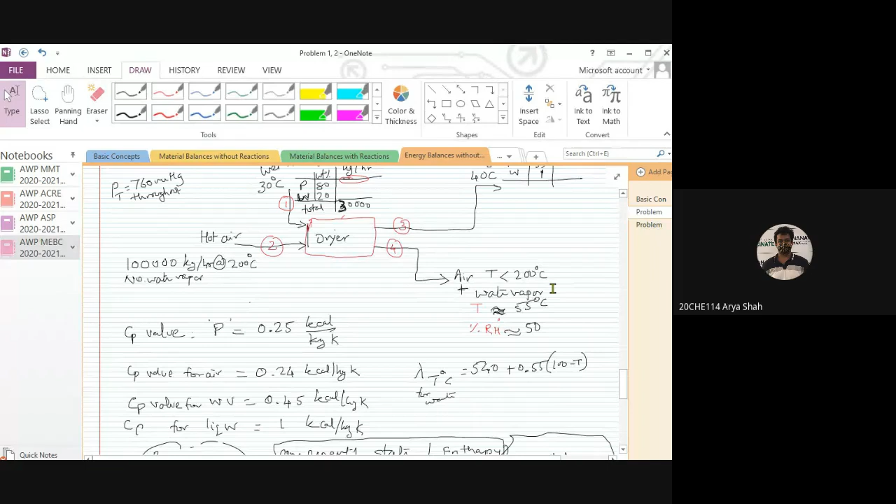Understood, sir. Okay. So now, recording has started.

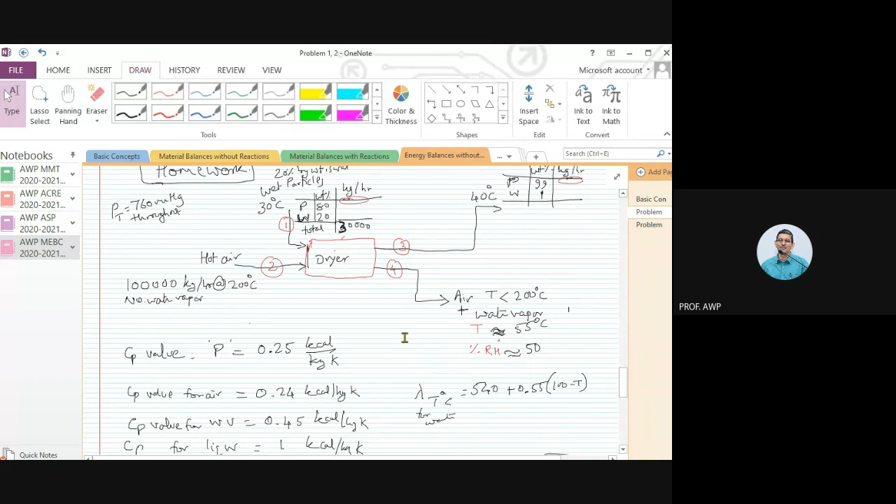All right, so shall we see this problem? Shall we solve this problem, or shall we go to the next problem, or shall we solve the problem with respect to that reference method?

Yes sir, yes sir. Yes for what? With the reference method. Solve the method with the reference method. Okay, fine, fine, we will solve.

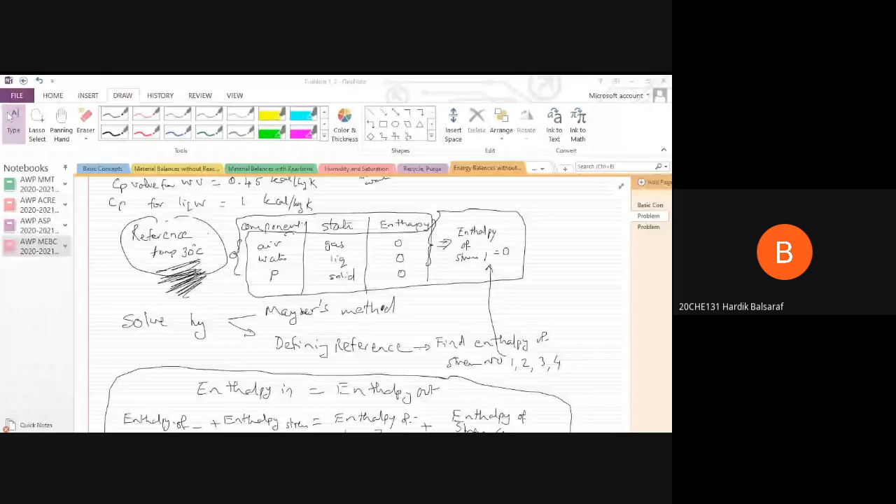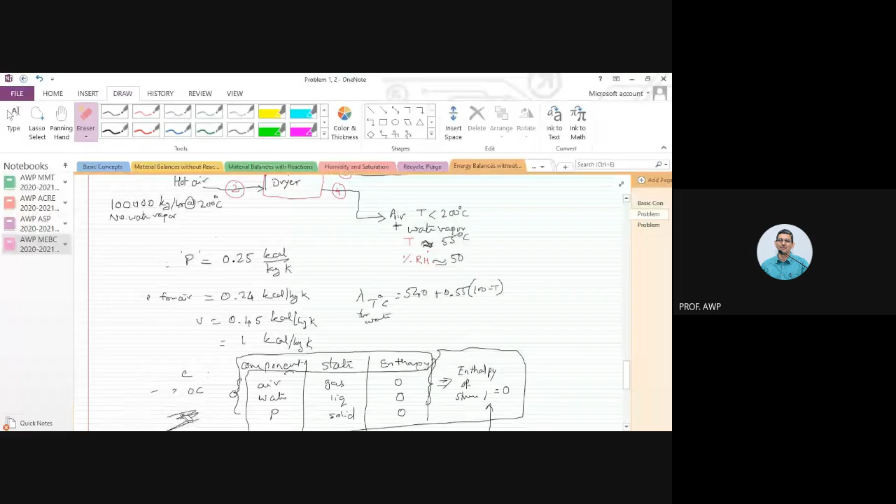So let me just delete all these things, because I'm not going to tell you the actual solution completely. I'm just going to show you how to solve, in terms of the formulae, and then you can actually substitute the values and calculate. Let me just drag and delete all this once and for all.

All right, so what we are going to do, like potential energy, we will say that enthalpy at some reference condition is zero. Like we are saying potential energy at the ground floor is zero, right?

But if there is a basement, then we can say that even if I set the basement as a reference zero for potential energy, then the ground floor will also have some potential energy. Or if I'm living on the third floor, if I say the floor of my house is a reference, then any object on the floor of my house has zero potential energy, right?

So we are going to say that at some reference condition, enthalpy is zero. Now, for setting enthalpy to be zero, we have to specify components and their state. So what components are there in this problem?

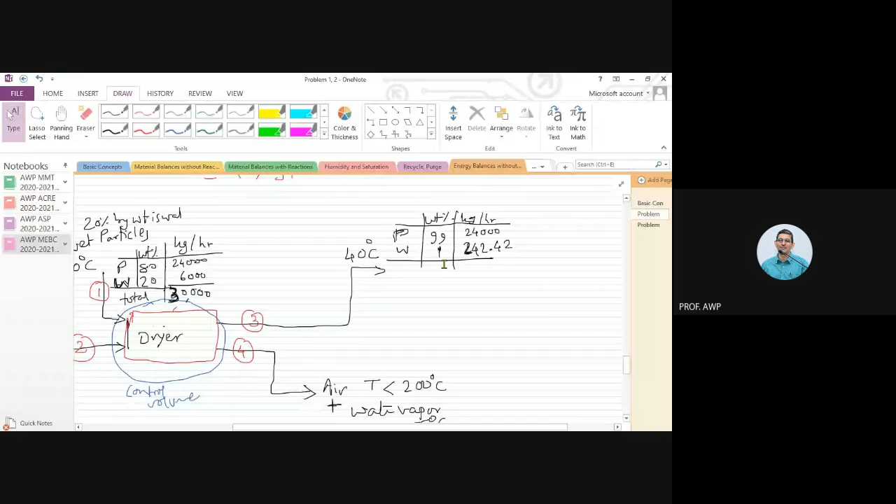That is nothing but 242.42 kgs per hour. Anybody gets this value? Anybody doesn't get this value? Just 242. Right, now let's work out the enthalpy of stream number 3.

What does stream number 3 contain? It contains P, 24,000 kgs per hour in the solid form at 40 degrees centigrade. It also contains water, 242.42 kg per hour in the liquid state at 40 degrees centigrade. So what is the enthalpy of this stream number 3 with respect to this reference?

That would just be 24,000 into Cp of solids into 40 minus 30, plus 242.42 kg per hour into Cp of liquid water into 40 minus 30, giving the enthalpy with respect to the reference. This is in terms of kgs per hour, Cp is in terms of kilocalories per kg Kelvin, temperature change in Kelvin. Kelvin cancels, kg cancels. So this stream number 3 is taking out enthalpy at the rate of so many kilocalories per hour.

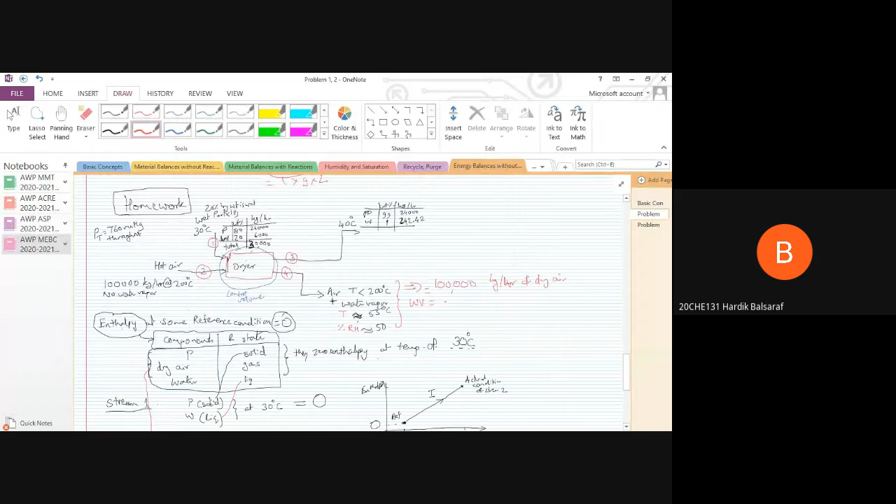How much water vapor is it going to contain? If I do a material balance across this control volume, the blue control volume, how much water will it contain? 5757.57. Right, 6,000 minus 242.42 kg per hour of water vapor. So if you just calculate this number, 6,000 minus 242.42.

It is 5757.58, let's say. Now, what is the temperature? We don't know what this temperature is, right? But we know that it contains this many amount of dry air and this much amount of water vapor.

So what we are going to find for stream number 4 - what does stream number 4 contain? Dry air, 100,000 kgs per hour, at some temperature T degrees centigrade. We don't know that T, right? It contains water vapor at the rate of 5757.58 kg per hour at T degrees centigrade, isn't it?

What is my reference? My reference is dry air at 30 degrees centigrade having zero enthalpy, and liquid water at 30 degrees centigrade having zero enthalpy. So with respect to this reference, if I look at the enthalpy of this particular stream, what would that be? Enthalpy of stream number 4 would be enthalpy associated with the dry air and enthalpy associated with the water vapor.

If you take this blue as a control volume, now we can say enthalpy balance, just like we have been saying material balance: whatever enthalpy comes in must be equal to enthalpy going out. Why? Because there is no extra enthalpy that we have provided to the dryer, or there is no heat lost from the dryer. We have made it a nice insulated, adiabatic kind of dryer. No heat comes in from outside, no heat is lost to the surroundings. Right? So enthalpy coming in.

So enthalpy coming in from stream 1 plus enthalpy coming in from stream 2 must be equal to enthalpy going out in stream 3 plus enthalpy going out in stream 4. Right? Do we have everything? Yes, we have enthalpy of stream 1, 0 kilocalories per hour. We have enthalpy of stream 2, so many kilocalories per hour we worked out. We have enthalpy of stream 3, that we worked out. And we have now enthalpy of stream 4. Right? Only one unknown is there. You just solve for T.

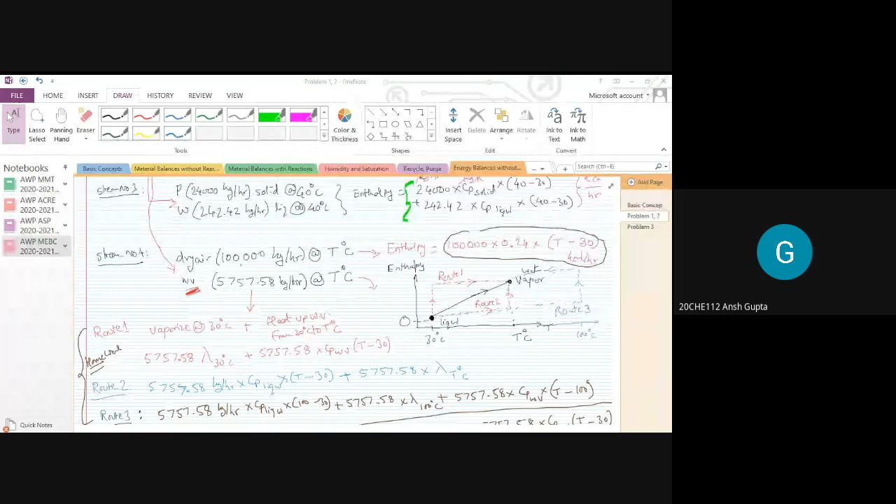Is that okay? Is it okay now with respect to reference? Any other question? Any other doubt? Anybody has any doubt in this method? No, sir. Ansh doesn't have any doubt. Can we go to the next problem? Yes, sir.

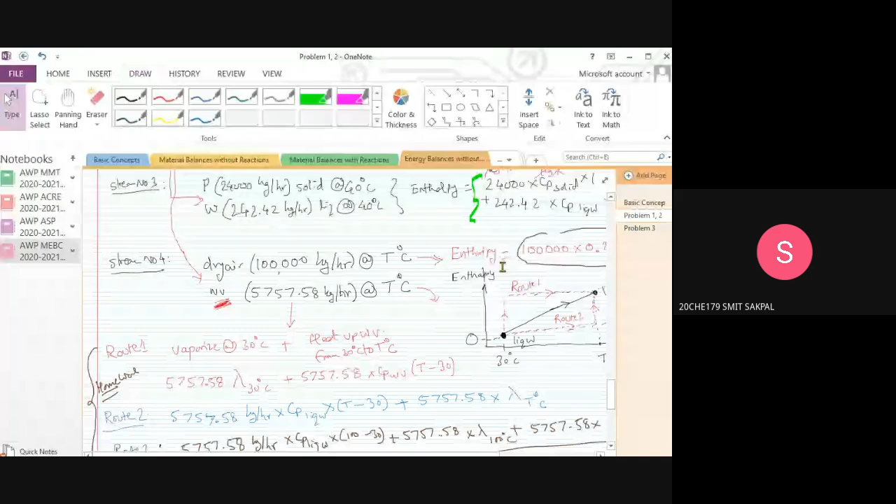Okay, so there is something called a cooling tower in chemical plants. I will tell you what that is. So have you...

So at home, if you have to cool something, what do you do? Put it in the fridge, okay. Or increase its surface area if it's a liquid, okay.

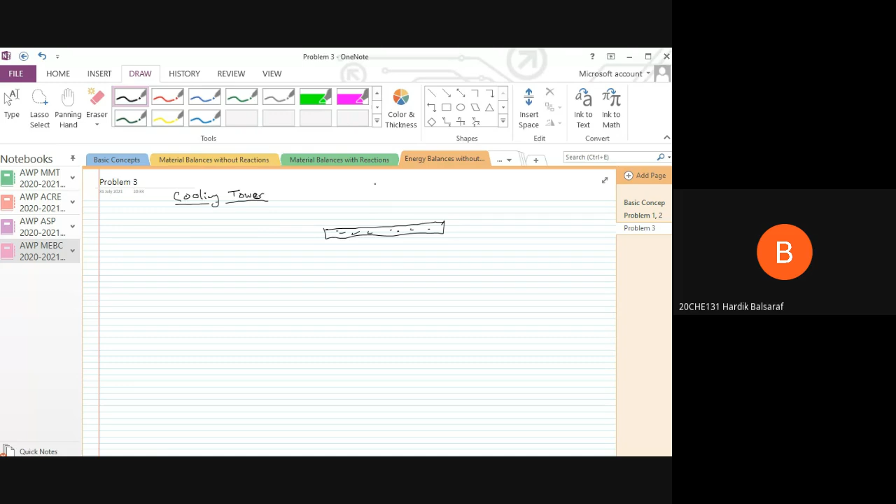Suppose you are eating Maggi, you have made it and you want to eat it, but it is boiling hot. Now how do you cool Maggi? We take a plate, take it in a plate, spread it out, and then stir it and keep it under the fan, right? There's some other way also you can do it.

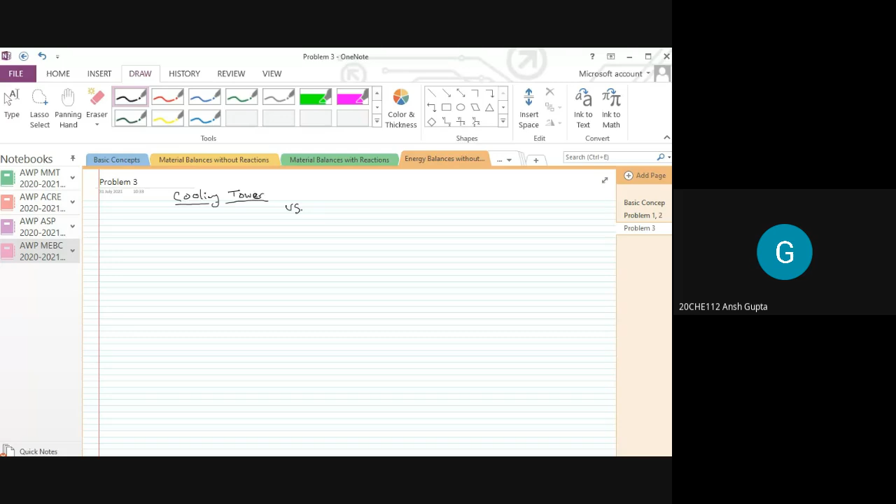Sir, use a bigger utensil and put water in it. Right, you take your Maggi here and your spoon, and you take water in an outside container and make sure you stir this also, right? So this water picks up the heat from the Maggi, and this water becomes hot. Now what do you do with this water? The Maggi, of course, you eat, right? So that is out of question. What to do with Maggi is understood. What do you do with this hot water now?

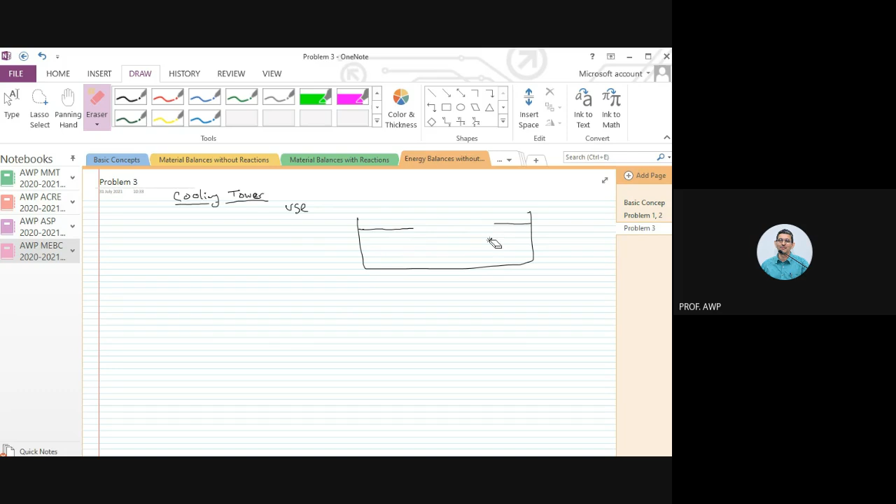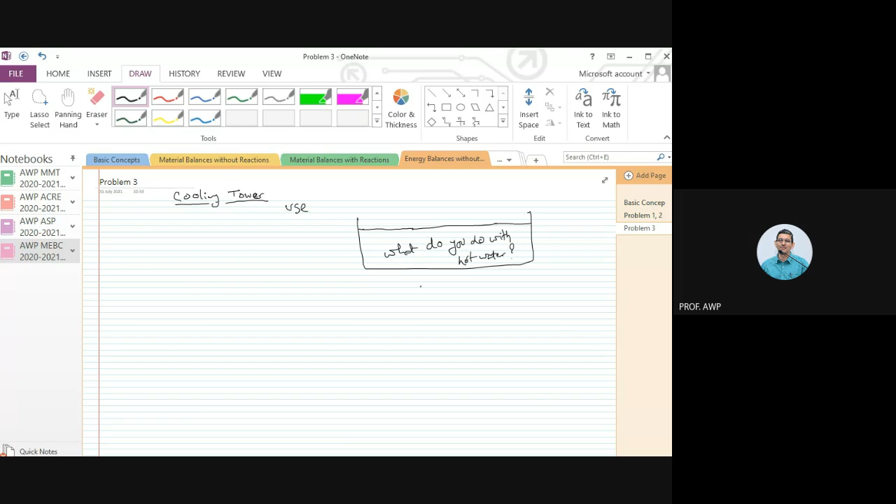Give it to your mother. Give it to your parents. Give it to your younger sister or younger brother. No? What do you do with this hot water at home? Just throw it down the drain, down the sink, right?

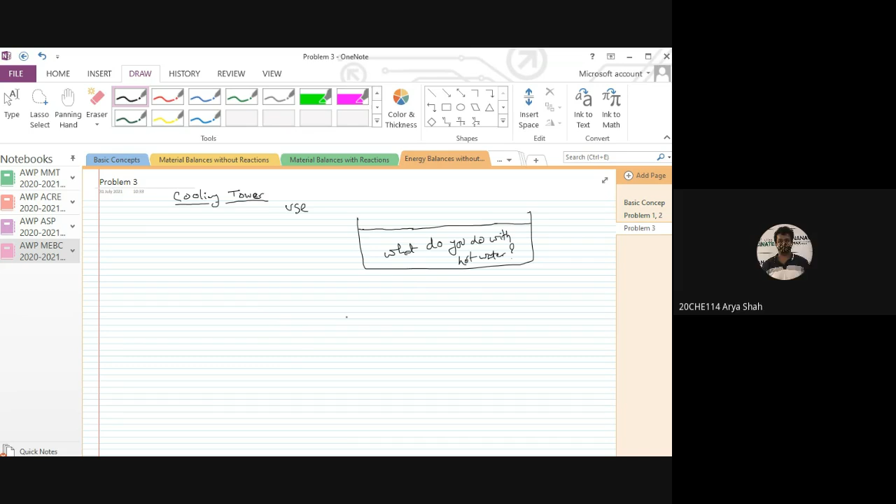Unfortunately, when you're talking about plants, you use the same concept. You use something called cooling water to take out heat from something. Let's say you want to condense some vapors, or you want to cool something from, let's say, 200 degrees centigrade to some 40 or 50 degrees centigrade. You use cooling water to take out heat from that particular process or substance, and in turn, this cooling water gets heated.

Let's say it gets heated to 50 degrees centigrade. Now, what do you do with this cooling water that has now become hot in the process? If you throw it down the gutter, what will happen?

We'll have adverse effects in the environment due to heated water. The overall temperature would rise.

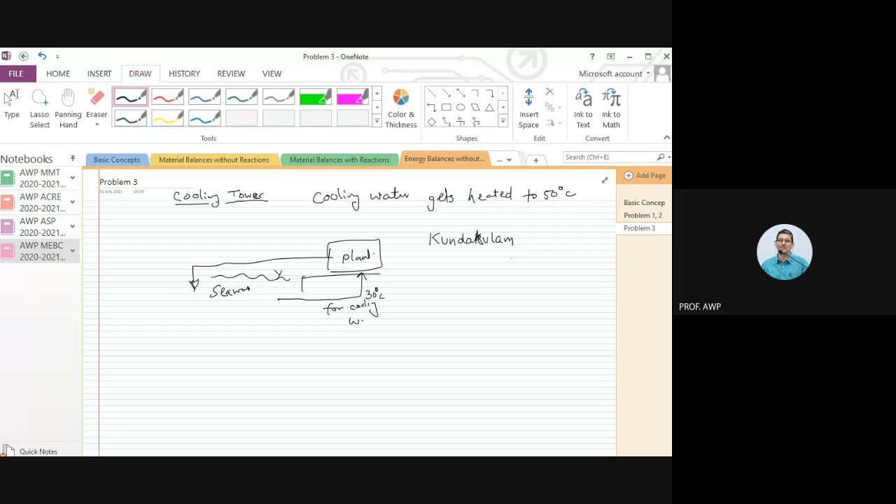So seawater maybe it is coming into the plant at 30 degrees centigrade, and going out at maybe 40 or 45 degrees centigrade. Just for this problem, we are taking 50 degrees centigrade. So these fishermen started protesting, and therefore this nuclear power plant ended up in some problem, but it is resolved now. It is on.

So we need a way to cool the water from, let's say, 50 degrees centigrade to some, let's say, 30 degrees centigrade, so that the cooling water can be recycled back to the plant, right? So what we will do is, this was our sea, this was our plant.

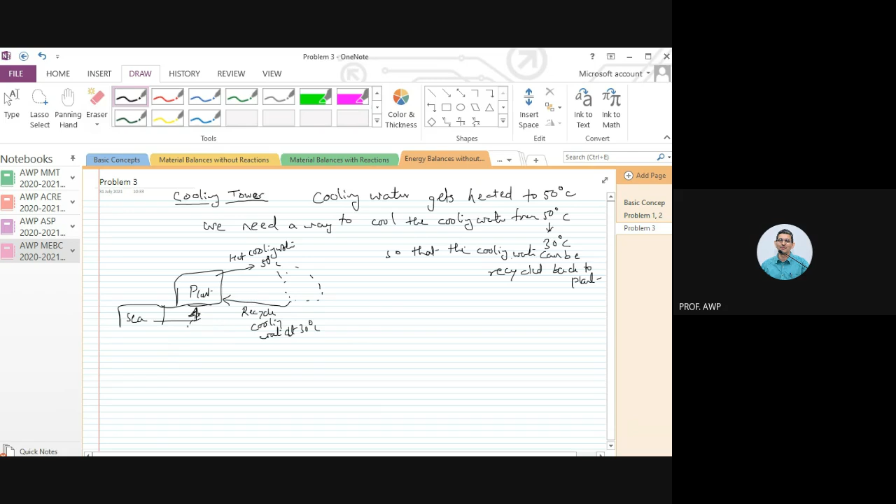We will take cooling water, seawater, at 30 degrees centigrade. We will get hot water. This is at 50 degrees centigrade, but we will do something to this water so that we can recycle cooling water at 30 degrees centigrade. Then I don't need this seawater intake, or I'll need it, some amount, but not large amounts.

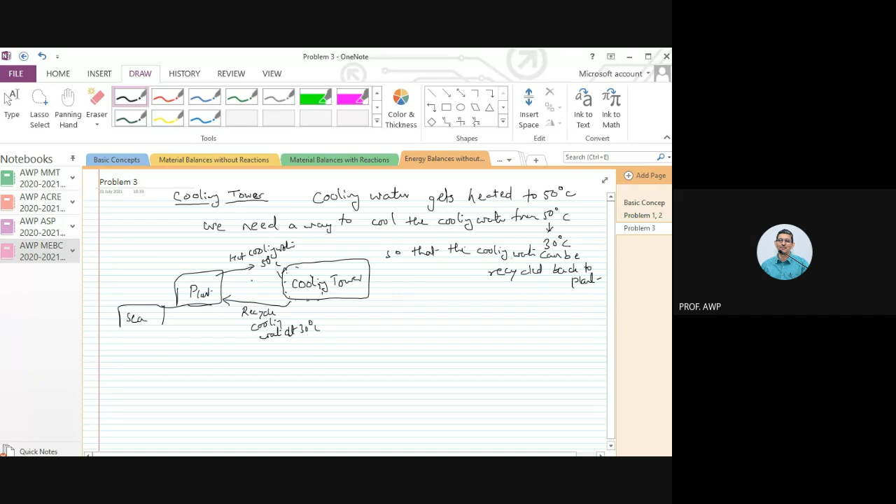Do you agree? So something is done in something called a cooling tower. The cooling tower will be used to cool that hot water back from 50 degrees centigrade to, let's say, 30 degrees centigrade, and we will recycle that cooling water back into the plant, right? Have you understood the problem, or have you understood the context of the problem? Now I will tell you the actual problem.

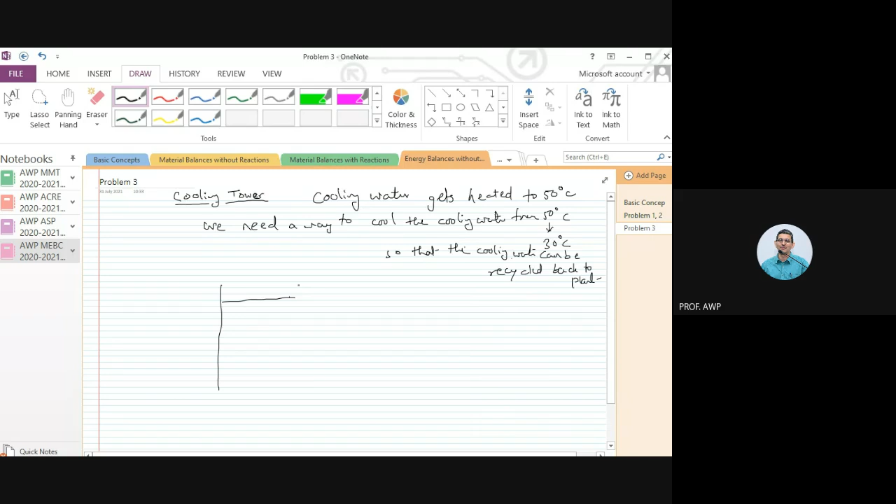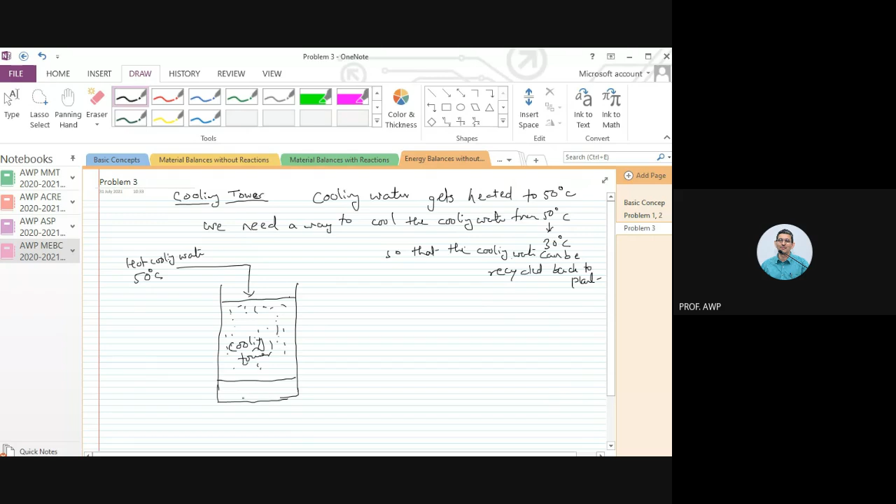Context of the problem is clear? Yes, sir. So this device called a cooling tower, it's an equipment. So this hot water, now this is the actual problem that we are going to solve. Let's say this hot cooling water is at 50 degrees centigrade. We spray this cooling water and make it flow down this column. It's a column, and then we collect this cooling water.

So that means heat has to be taken out from this cooling water, from this hot water, right? Yes, sir. Can you think of some way of taking out heat from this cooling water at 50 degrees centigrade?

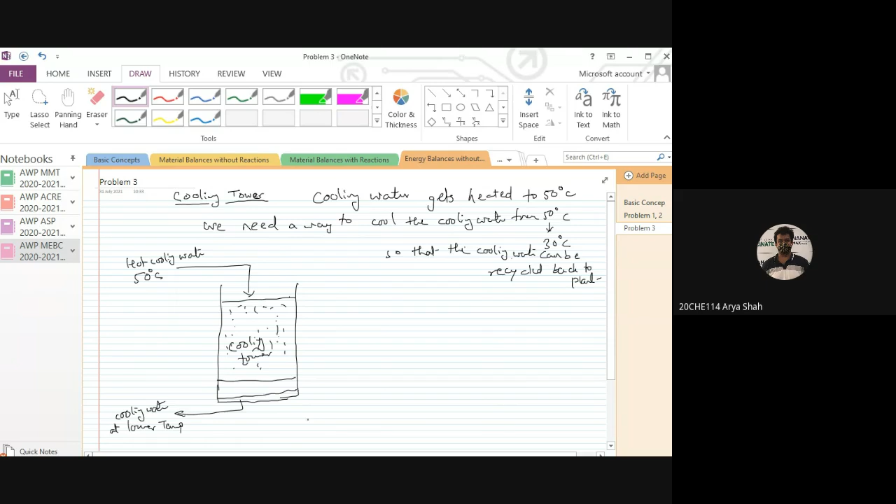By supplying air that is at a lower temperature, and with very less humidity, relative humidity is very low. So we supply ambient air, which is at a temperature lower than 50 degrees centigrade, and also not 100% saturated. So some of the water vaporizes to saturate the air, and then the rest of the water gets cooled because enthalpy is taken out from the water itself.

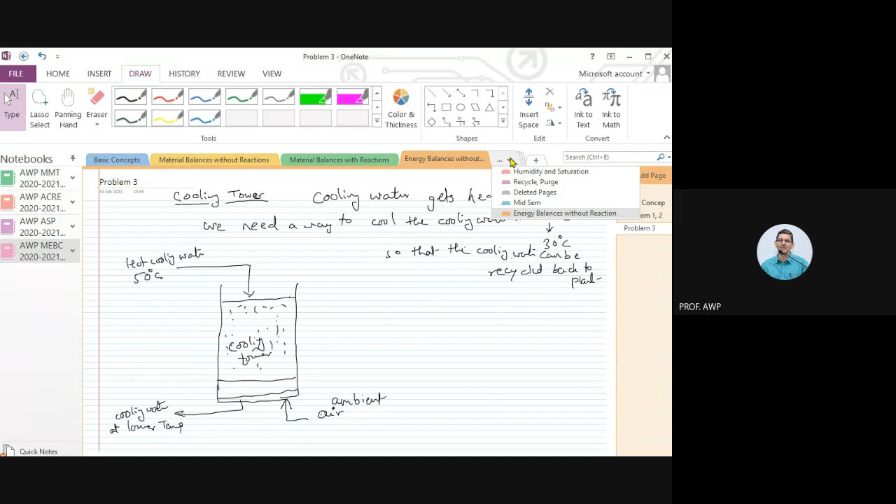Just like our cooling, we had wet bulb temperature. Do you recall? That water was cooling down. Do you recall the wet bulb temperature? We had water temperature falling, falling, falling, falling. Then it came to wet bulb temperature. Yes or no? Yes, sir. Same thing is going to happen here as well.

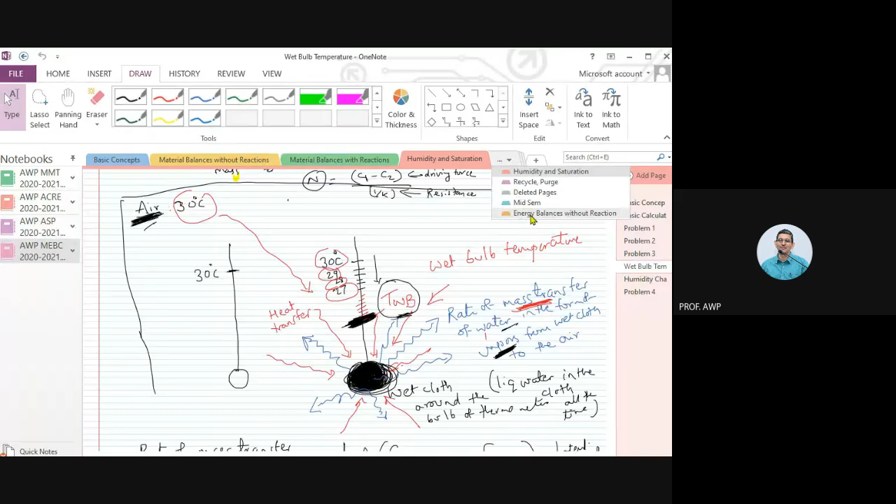So we will supply ambient air, which is at a lower temperature. This air will now become hotter and more humid air.

And this air can go to atmosphere. Do you agree with this? This is how a cooling tower works. And then this cooler water we can recycle.

Okay, so here is the problem. Assume that this hot cooling water is at 50 degrees centigrade. We want this cooling water, after passing through the cooling tower, to be at 35 degrees centigrade, so we can recycle it back to the plant. Air that is supplied, ambient air, let's say it is at a temperature of 30 degrees centigrade, with a wet bulb temperature of 25 degrees centigrade.

Okay, let's take the basis that we are supplying 1 kg of this hot cooling water, and we supply 0.5 kgs of dry air. Dry air means the dry air part of the ambient air is 0.5 kgs, but it will also come along with water vapor because it has a wet bulb temperature of 25 degrees centigrade. Let's assume that the total pressure is 760 mm Hg throughout.

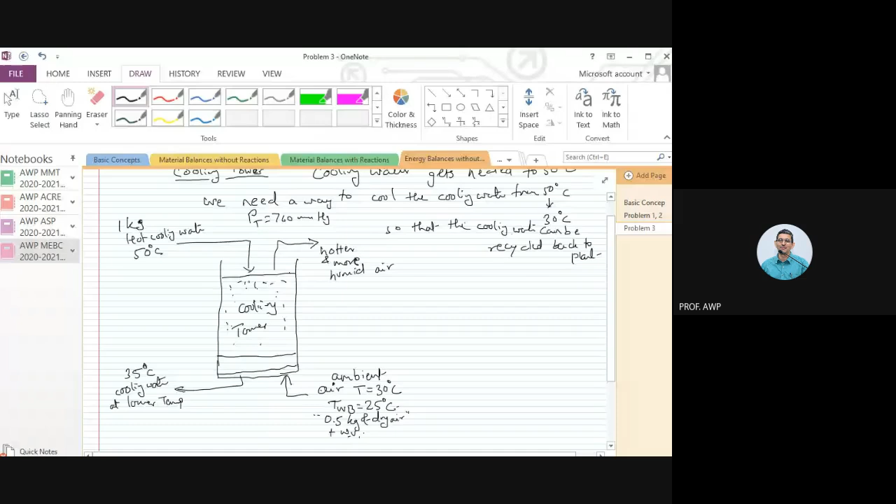Okay, here is what I want you to find. Let's assume that this humid air, this hot humid air, becomes 100% saturated, but it is at a higher temperature than 30 degrees centigrade. So let's say it is at T degrees centigrade. This is what I need to find out.

And I need to find out how many kgs of this cooling water, which is at 35 degrees centigrade, we will get, because some of the 1 kg of water that we supplied will get vaporized. So we will get something less than 1 kg here in the cooler cooling water at 35 degrees centigrade. Do you agree? So these are the two things I need to find out: what is the temperature of this outgoing humid air, and how many kgs of this cooling water we will get at 35 degrees centigrade. It will be less than 1 kg because some of it will vaporize and the air will become hotter and more humid.

All right, solve this problem. You can give some names to these streams. Let's call this stream number 1, stream number 2, stream number 3, and stream number 4.

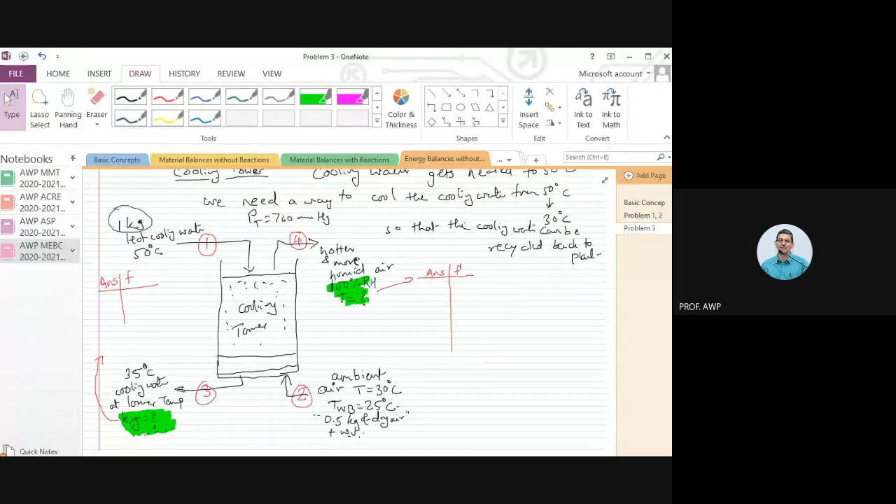Anybody stuck? Anybody needs hints? Anybody wants hints? Good. Nobody wants hints.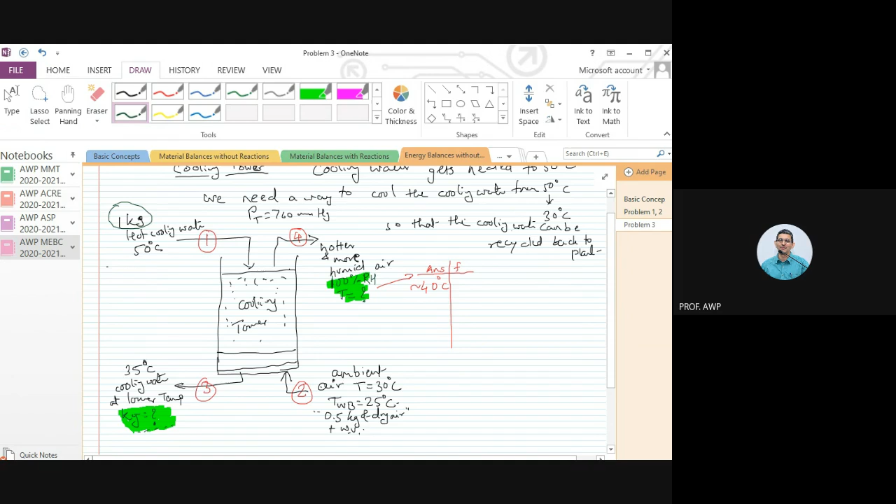Yes, I'm listening. Kgs of water evaporated is 0.0152. Right, okay. So we will say kgs of water evaporated, shall we say 15.2 grams? Yes, sir.

Did you use Excel or did you use calculator? Graphic calculator. Ah, okay. So you're just plotting the left hand side, right hand side as a graph, and then seeing the point of intersection. Yes, sir. Ah, okay.

So finally, you converted the two unknowns into one unknown? Yes, I converted mass in terms of temperature, and then I got it.

Yeah, your answer is more or less right. I don't have the exact value, but it looks okay. Mine is coming something like 44 degrees centigrade and 22.2 grams, but that's okay. Yes, sir, I got 44.5 degrees Celsius and 22.6 grams. So just a small error, I guess, somewhere.

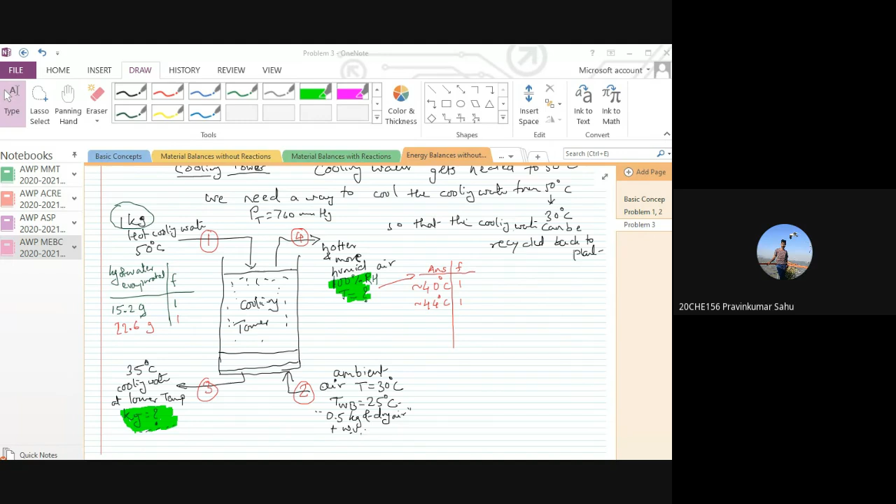Praveen, any answer? Sir, calculate. Mayur, are you trying with Excel? Yes, sir, trying. Okay.

So I'm getting 45 degrees Celsius and 23 grams, sir. Okay.

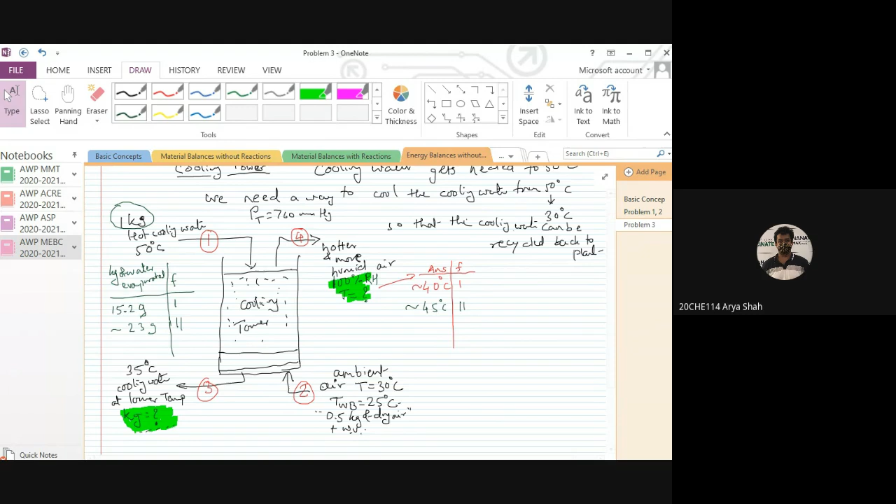Arya, just check, there might be some small error somewhere. Yes, sir, I'll do that. Which method did you use? Did you use your method or did you use the reference condition? Sir, I used my method, but I think I made a mistake in the calculation of humidity. Maybe there might be a small error over there.

Okay. Nishant, which method did you use? Sir, I used my method. You still don't seem to be convinced about the utility of defining a reference and finding out conditions in stream numbers, enthalpies of streams 1, 2, 3, 4, and writing enthalpy in equal to enthalpy out. Sir, like- That's okay, you need not be convinced. Hopefully, by the end of next week, you will be convinced.

Urv, which method did you use? So I used my method, I didn't use a reference method. Ah, okay.

So the problem with your method is that you have to keep track of where each component is going, where water is going, where air is going. You have to figure out which component is going from what stream to what stream. So imagine a plant where there will be multiple streams - whether it will be a good idea to use your method or to use enthalpy in, enthalpy out kind of method.

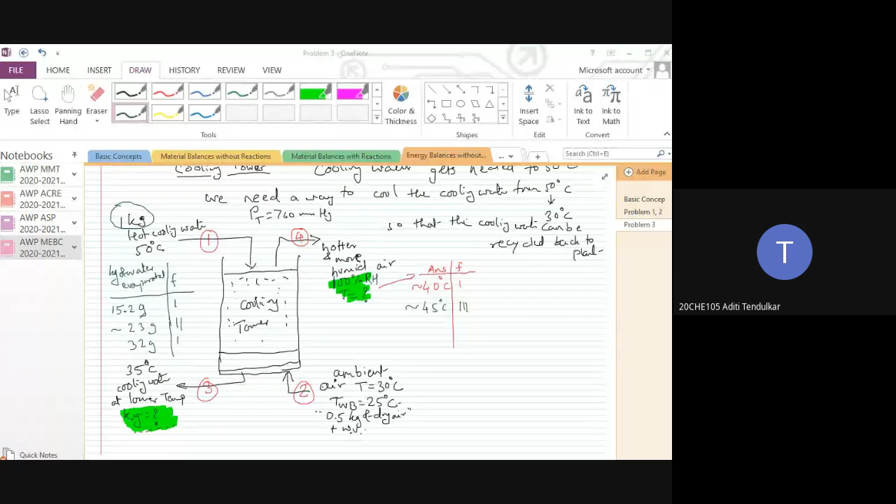Aditi, would you like to volunteer? So I'm still trying. Okay, but would you like to volunteer and tell us what you have tried so far? So I'll take some time.

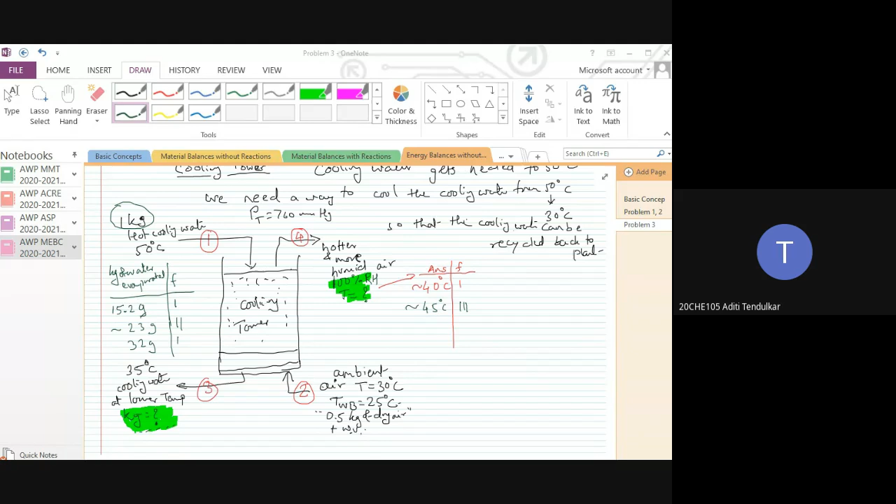Some means how much time? 1 minute, 2 minutes, 5 minutes, 10 minutes, 20 minutes? Quantify. Some is a qualitative word. Bhakti, would you like to try? I don't think you have tried any time.

Okay, let's just try to solve with our reference condition kind of thing. So stop whatever you are doing. Stop wherever you have reached. Stop at that point. Don't go forward. Just let us try to solve by this method. Let's say we take a reference. Anybody, what reference would we want here?

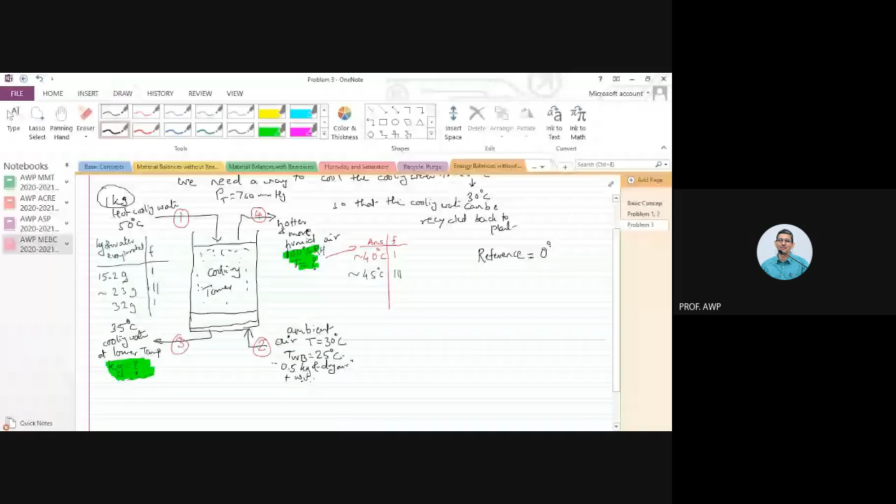30 degrees centigrade you can take. Let me just take some reference as last time. Let's say 30 degrees centigrade. I can take reference. Let's just say I want to take reference at 0 degrees centigrade. Okay, and I will say dry air has 0 enthalpy.

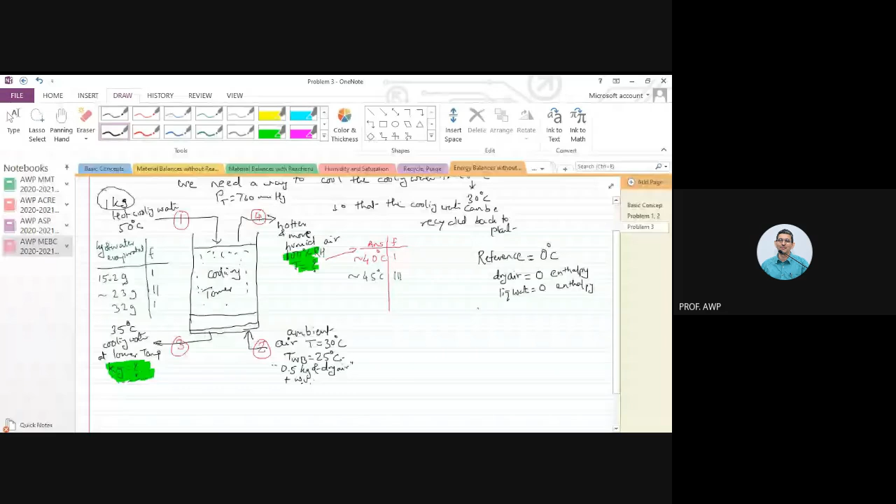I will say liquid water has 0 enthalpy at this reference temperature. These are the only two components that are there. Air and water, these are the only two components. Air is in the gas state, water is in the liquid state or vapor state.

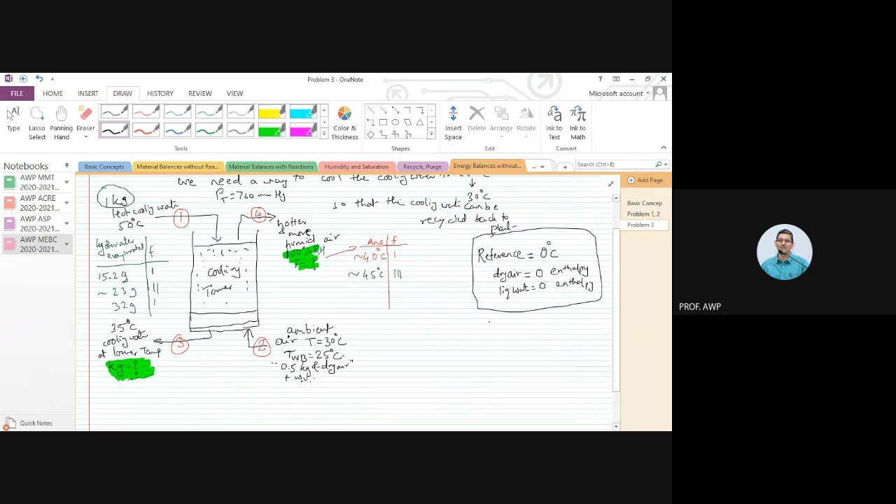So I have a choice whether I want to take liquid water at 0 enthalpy or water vapor at 0 enthalpy. Let me just, for convenience, let me just say liquid water at 0 enthalpy. So I will just have to add enthalpy wherever there is water vapor.

Okay, so let's talk about stream now, material balance, right? So assume material balance. We don't know how much water evaporates. Let's say X kgs of water evaporate.

So then from material balance, this number of kgs that are there in stream number 3 would just be 1 minus X. And kgs of water vapor in the stream number 4 would be the humidity of stream number 2. So at 25 degrees centigrade, at 30 degrees centigrade and a wet bulb temperature of 25 degrees centigrade, we can use the humidity chart

because pressure is 760 mmHg. If pressure had been something else, we would not have used the humidity chart to get to the humidity, right? So if you use the humidity chart, does anybody want me to explain humidity chart again, or will you know how to calculate using the humidity chart? Somebody say something. You want me to open humidity chart and show you, or are you comfortable enough in doing it?

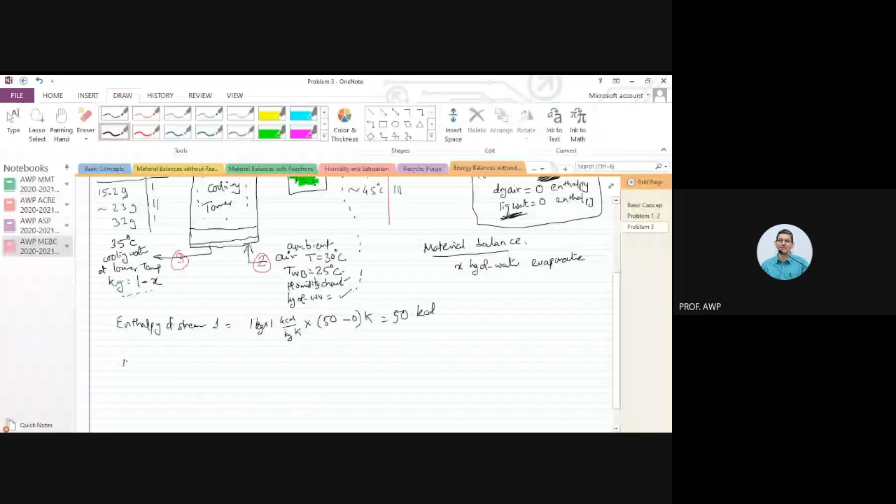Okay. Enthalpy of stream 3. Stream 3 has liquid water. It has 1 minus x kgs of liquid water, Cp of liquid water, and it is at a temperature of 35 degrees centigrade. With respect to the reference, it is 35 into 1 minus x kilocalories.

Okay. Enthalpy of stream 2.

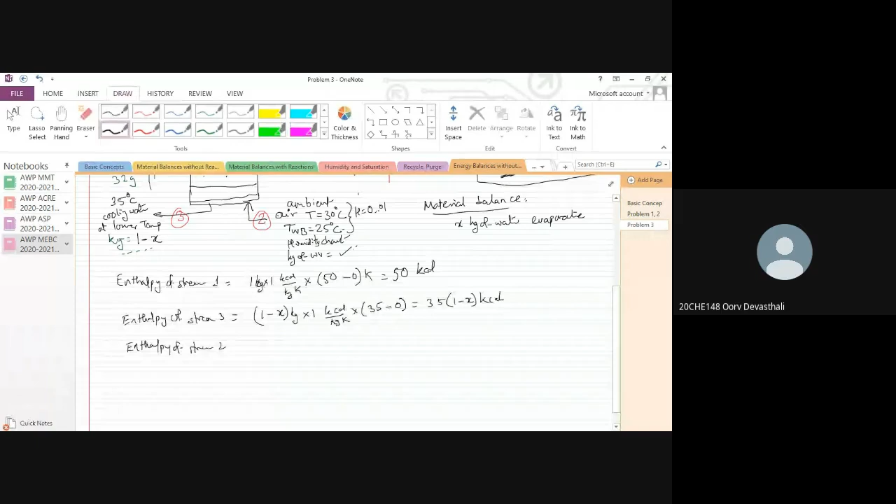Somebody tell me, actually H is actually humidity here. So 0.018, which is because of 0.5 kg air becomes 0.009. So it is 0.018 kgs of water vapor per kg of dry air, so the kgs of water vapor would be 0.009 kgs.

Thank you. And then the kgs of water vapor in stream number 4 would be 0.009 plus x kgs. Okay, so now enthalpy of stream 2. What does stream 2 contain? 0.5 kg of dry air and 0.009 kg of water vapor.

But my reference is liquid water at 0 degrees centigrade having 0 enthalpy. So 0.5 kgs of dry air, that will be 0.5 into Cp of dry air 0.24, at a temperature of 30 degrees, 30 minus 0 reference. So in terms of enthalpy versus temperature, if we think about 0 degrees centigrade as 0 enthalpy, this is liquid water. We have now water in the vapor state at 30 degrees centigrade in stream number 2.

So again, going from here to here, we can go by different paths. We can go by this path, the red path: heat and vaporize liquid water, and heat up water vapor at 0 degrees centigrade, or heat up liquid water and then vaporize at 30 degrees centigrade. So let's just take, let's say, route 1, route 2. Let me just take route 2 in this particular case. Just any route is okay.

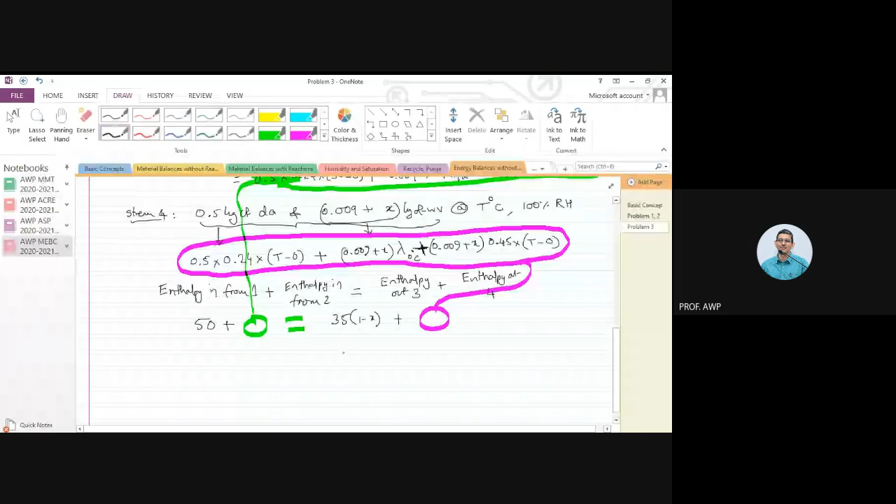Right, so I have two unknowns now. One equation is from enthalpy balance. Two unknowns, t and x. But are t and x related? What do I know about stream number 4? Stream number 4 has 100% RH. Do you agree?

So if I say T degrees centigrade, I can find out vapor pressure at T degrees centigrade using Antoine equation. Humidity would be vapor pressure divided by 760 minus vapor pressure, into 18 divided by 28.84, kgs of water vapor per kg of dry air.

And then I can write in terms of x, because total kgs of water vapor is 0.009 plus x, and kgs of dry air is 0.5. So this must be equal to 0.009 plus x, that is kgs of water vapor in stream number 4, divided by kgs of dry air. Do you agree with that?

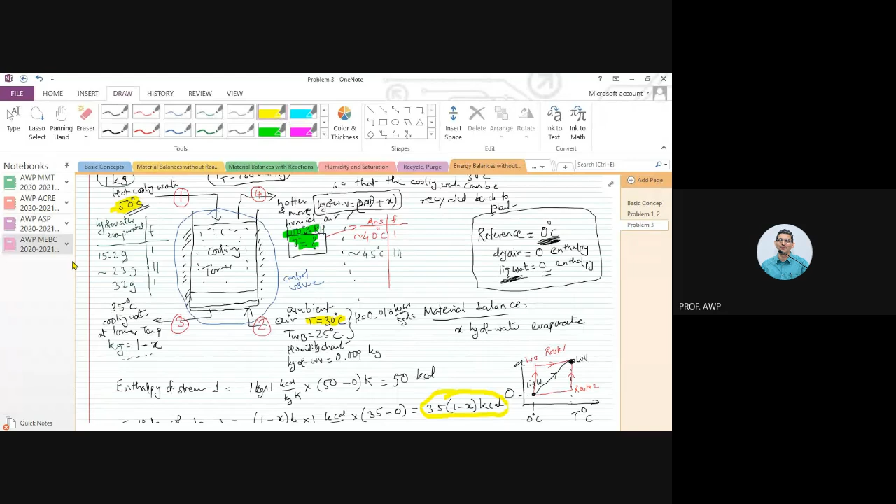It has to be somewhere in between 30, because air is going to get hotter, but it cannot get as hot as the hot water, nor can it be more than the hot water, because hot water is what is giving up heat. Do you agree with that? Yes, sir. Right. Yes, sir. Yes, sir. Right.

So suppose I assume that the temperature is 40 degrees centigrade. Now I can calculate vapor pressure at 40 degrees centigrade. Because it is 100% RH, vapor pressure and partial pressure must be the same. Then I can calculate humidity at 40 degrees centigrade, 100% RH, and then I can calculate what would be this value of x.

Now I have got 40 degrees centigrade, and now I have got x. I can get the enthalpy of stream number 4 as well. I can now check whether LHS of enthalpy balance equation and RHS of enthalpy balance equation are equal.

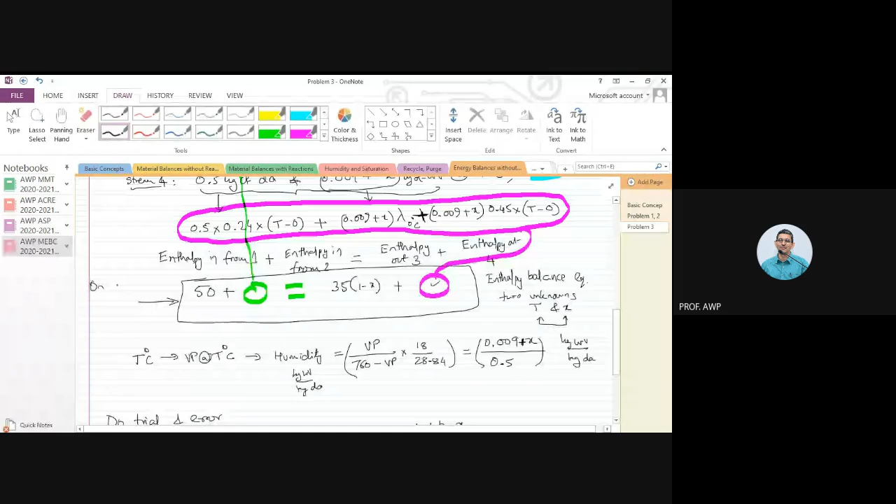It is finally one nonlinear algebraic equation to be solved. So if LHS and RHS are equal, that means my assumption was correct. But if they're not equal, maybe I will assume the next guess.

Next guess, temperature is, let's say, 45 degrees centigrade. I will find out vapor pressure at 45 degrees centigrade. I will calculate x, because stream number 4 is 100% saturated. Now I will put in the energy balance, find out the enthalpy of stream number 4. I will check the LHS and RHS.

LHS is enthalpy coming in, RHS is enthalpy going out. Check if they are matching with each other. If not, I will find out which is larger, LHS or RHS. Then I will decide whether I want to go below 45 or above 45. If you do it only once or twice, you will get an answer very quickly.

Or use any of your softwares, Excel, or your calculator, anything that you like.

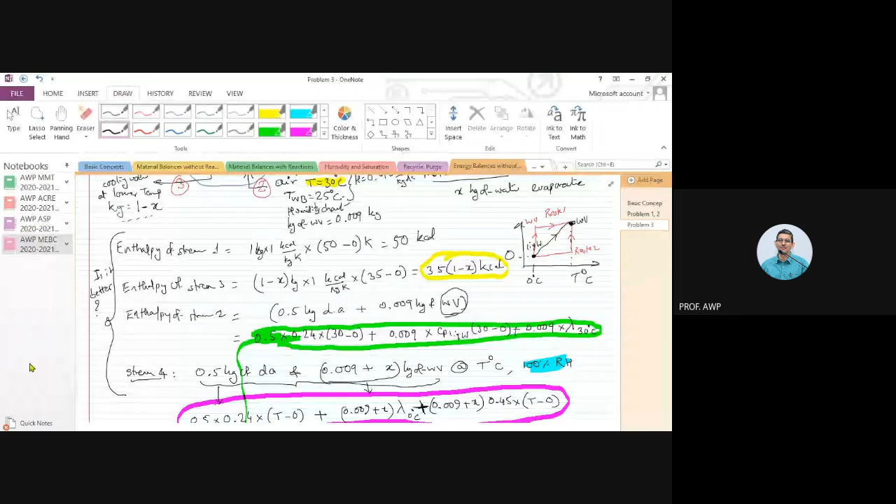It's like I like red color, that's okay. I like vanilla ice cream, or I don't like vanilla ice cream, I like butterscotch better. It's up to you. Slowly, I'm trying to get you to use this method, but it's okay.

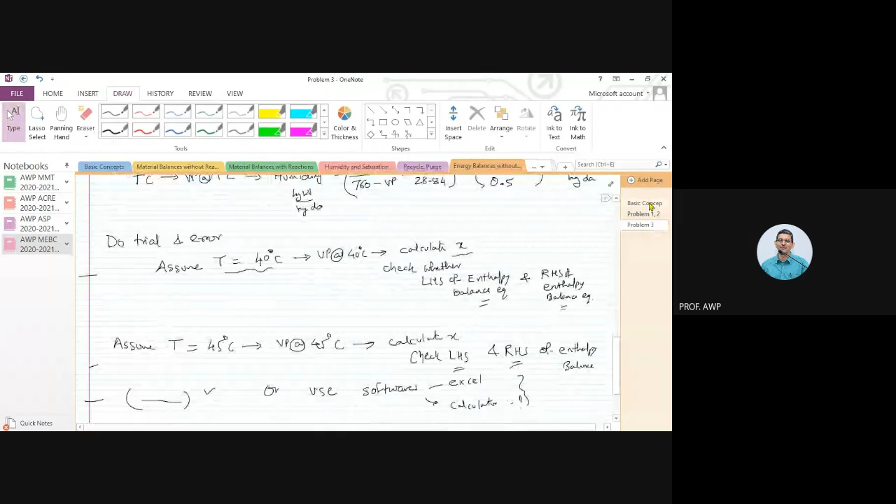Okay, can we go to the next problem? Yes, sir. Any other doubt? Ram, are you comfortable? Yes, sir. Are you comfortable with solving the problem? Yes, sir. Okay, let's go to the next problem.

Anybody uses salt at home? Yes, sir. Very nice. What is the cost of that salt? 16 rupees per kg. 21? 20 rupees. 70, 70. 21, I thought you were saying 71. Okay, so let's say cost of salt is, let's say, 20 rupees. Okay, how do you make salt?

Evaporating salty water. Salt water comes from where? Seawater, right. So let's assume we have something called an evaporator. We have used evaporator earlier, but we didn't see how it looked like. Now we are going to see how it looks. So let's say we put in salt water, seawater. Let's say this seawater contains 3 weight% sodium chloride.

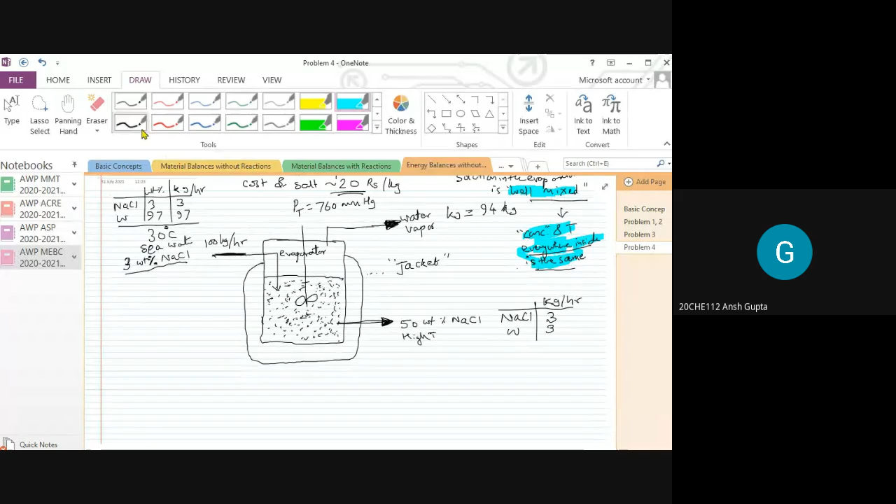I will draw a picture for you. Imagine there is a milk cup. You are stirring it. Your hot milk is coming in at, let's say, 80 degrees centigrade. Now it is too hot for you to drink. So you are having this water outside. You have a straw, and you're drinking milk all the time, which is at 40 degrees centigrade. 50 also, it will cause burns.

Right? So hot milk is coming in all the time. You're drinking milk all the time at 40 degrees centigrade. Everything is the same, temperature is the same inside everywhere. And because you are taking the substance out from this vessel, this temperature also must be 40 degrees centigrade all the time. Steady state. Now can you visualize, Ansh?

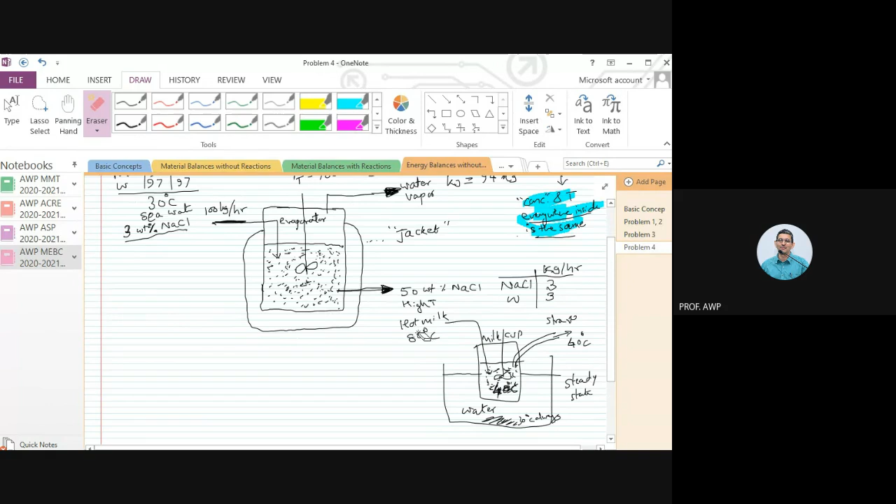Yes, and this water is infinite. Assume that this water is always 30 degrees centigrade. Arya, can you visualize now? Instead of milk, we have salt solution. Somewhat, but okay. Because this 50% solution is coming out from inside the evaporator, concentration everywhere must be 50%. It is well mixed. Concentration everywhere inside is the same. It is equal to the outlet concentration, not inlet, because as soon as that comes in, it gets mixed. That mixing is so vigorous.

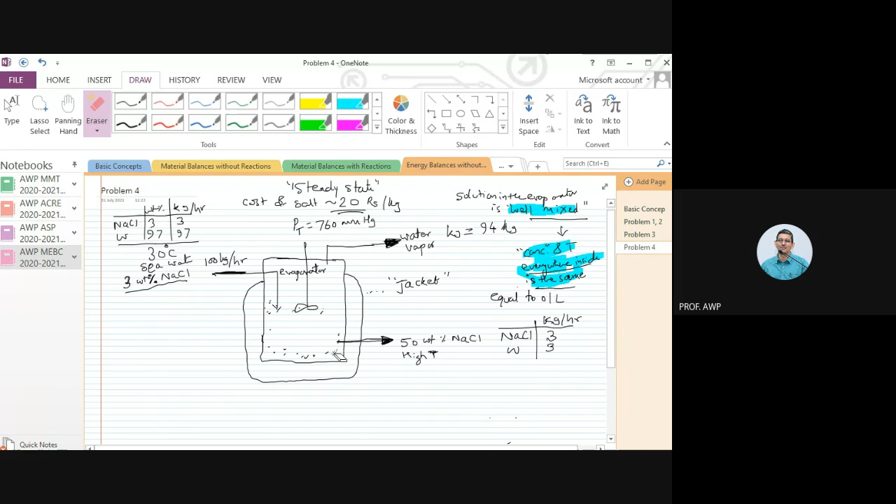Now can you visualize? It's a very, very important chemical engineering concept. We are going to use it again and again. Well mixed, that's the concept. Concentration everywhere is the same. It is equal to the outlet concentration.

Okay, just think about it, I will give you some time. So this concentration everywhere inside is 50 weight percent. That's how that solution is coming out. It is coming out from inside, right? So inside concentration must be equal to 50%. Okay, Arya? Yes, sir. Okay, what would be the temperature inside? Can you tell me, the temperature that is coming out. Temperature inside as well as temperature at which it is coming out, are they the same? Yes, sir, same, because it is well mixed. Yes, sir. What do you think will be the temperature?

What is evaporating? Water, water. So do you think this solution is boiling? Yes, solution is boiling. Otherwise, how will water evaporate? So boiling is temperature specific. Evaporation is not temperature specific.

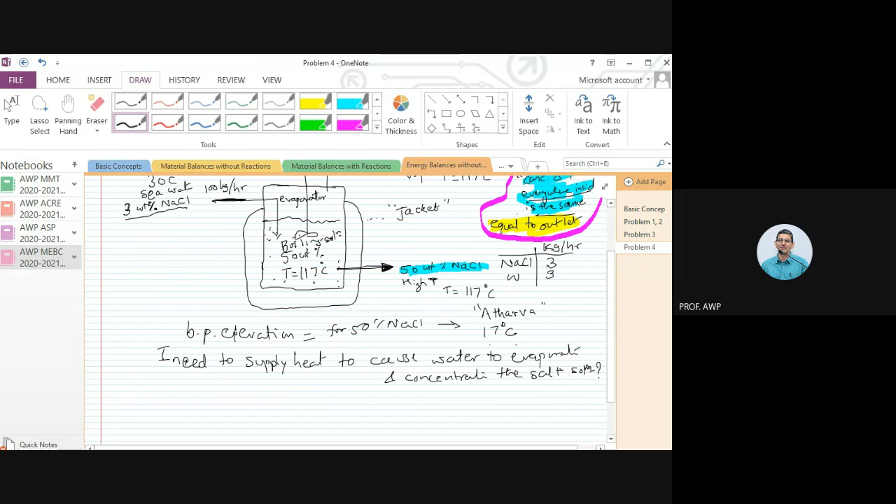Yes or no? Somebody say something. Talk, say something, otherwise I don't know whether I'm talking to a wall or a computer screen. Everybody say something, 90 people. Let there be chaos.

So, any thoughts on how to supply heat? Anybody know, any thoughts on how to supply heat? Nobody has heated up anything at any point of time?

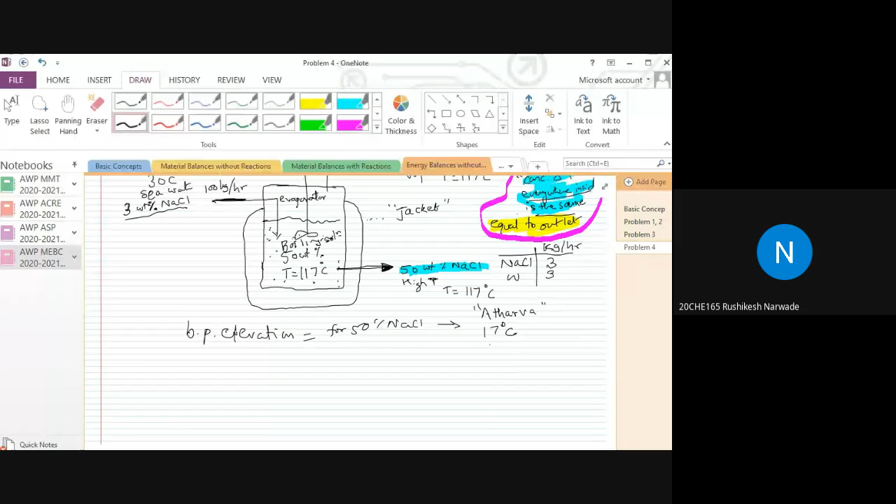We can use a burner there. Okay, I will have a fuel and I will have air and I will supply that to a burner. That's one way, use a burner, burn some fuel. Second is have a hot water bath.

Okay, that is another option, to have hot water outside. Hot water should be at what temperature?

Who was saying hot water bath? So, Hardik, what temperature should this hot water be? 40 degrees, 50 degrees, 60 degrees, 70 degrees, 80 degrees?

Sir, bare minimum would be 117 degrees. Correct, yes sir, 117. It has to give heat. This hot water has to be at a temperature greater than 117 degrees centigrade.

That means I will have to have this jacket, this hot water, at high pressure, right? Otherwise it will be in the water vapor state. Do you agree? Yes, sir.

Rather use an oil bath. Oil bath, right, third option is oil bath. Oil or a sand bath. Sand bath, yes sir, sand bath.

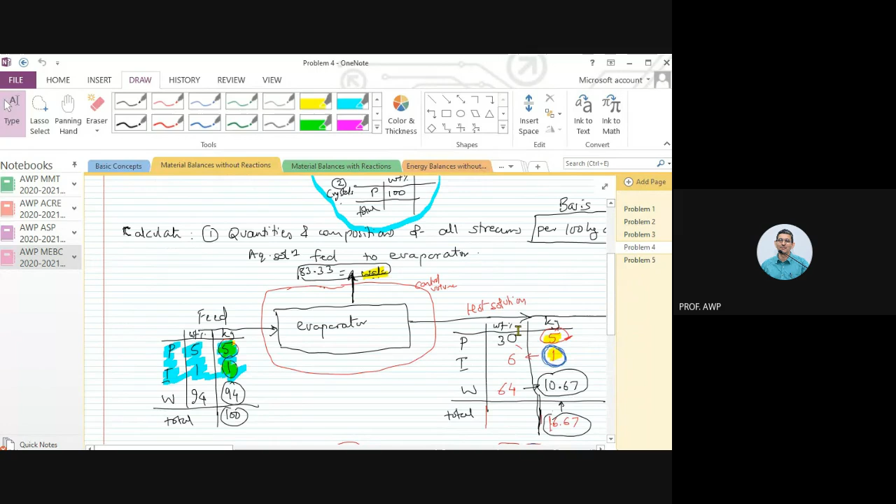Okay, now this hot sodium chloride solution, we will cool and we will crystallize out sodium chloride, right? Okay, Aryan? Yes, sir, right.

Any other doubt? Can I tell you what is to be calculated? Yes sir. So these properties of steam, I will need enthalpy of steam, right? I will need enthalpy of this hot water. Remember, this water and this steam, it is not mixing with the solution.

It is only outside, inside the jacket, it is only outside. This whole thing is inside a jacket. That steam is only supplied to the jacket. Steam is not mixing with that inside the evaporator.

I need properties of steam like enthalpy. As we go along, we will need other properties, what pressure should I have so that I will have steam at 137 degrees centigrade. It will condense steam. I want to condense at 137 degrees centigrade and give heat to that water. So I want to know pressure. At what pressure should I supply steam? Should it be 1.5 bar absolute pressure? Should it be 10 bar absolute pressure? Should it be 100 bar absolute pressure?

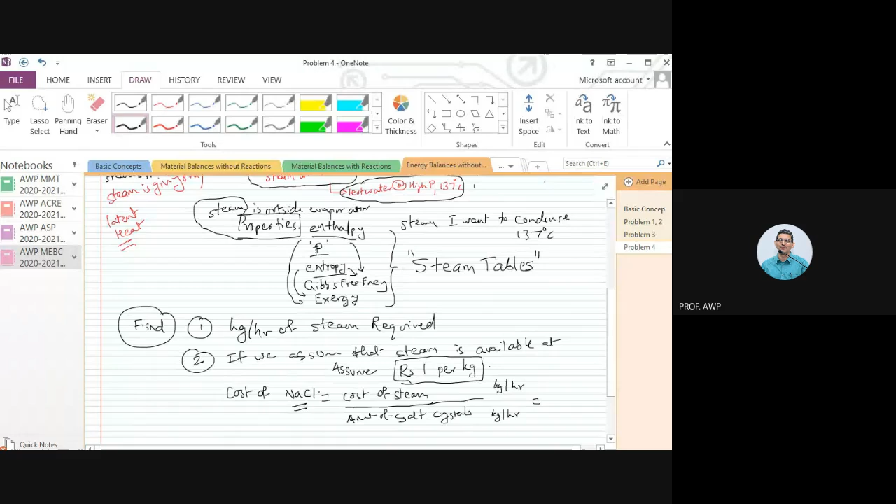Now the bigger question is, if this cost is more than 20 rupees, nobody is going to buy salt from you. You will go out of business. What should we do to reduce the cost?

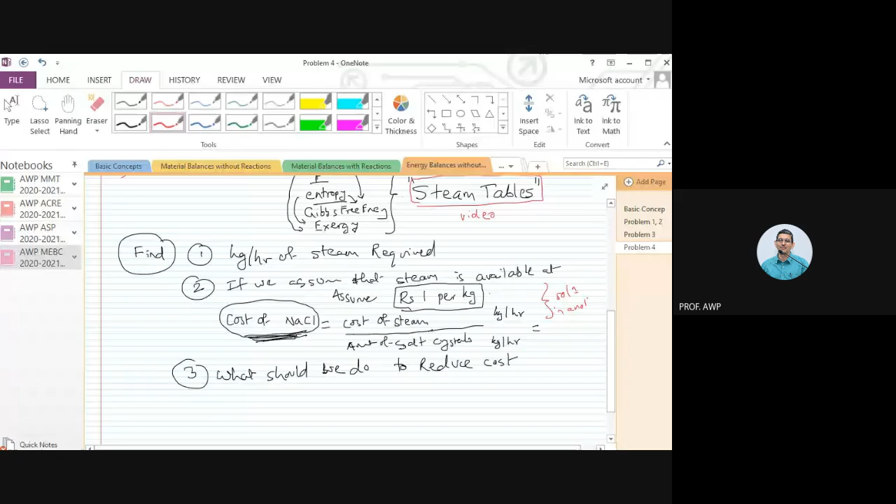So this is one video that I will share with you. This problem is also solved in another video, but don't look at the solution. And once you do this, there is a third video. How do we reduce the cost? That gives you your next problem.

So by Tuesday, watch this video related to steam table. It's a short video, only 5 to 10 minutes. And solve. So that's your homework. Then Tuesday we will see the solution, we will see the cost, and then that will be our next problem: how to reduce the cost. That will be in another video. So I'm sharing only one video related to steam table for you because you can solve this problem.

All right, shall we stop for the day?

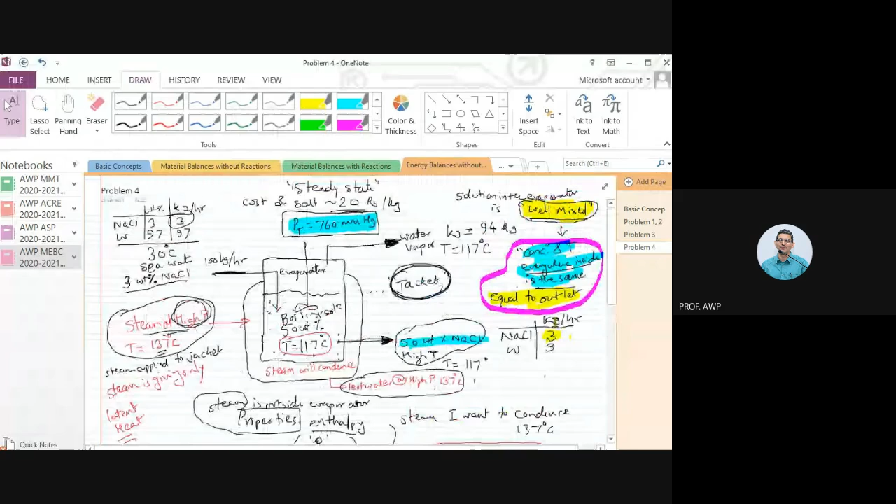Sir, the boiling point of the solution is coming as 108. 108, not 117? Yes, sir. Atharva, check your calculations. Yes, sir, it is 108. Atharva, are you there? You said 117.

I will check calculations, just check, but it doesn't matter. Whatever this temperature is, whether it is 108 or 117, I want this to be 20 degrees centigrade higher than the boiling point of the 50% solution. Atharva, you can check and correct if it is wrong. Praveen, Nishant, you can check and correct if yours is wrong. But anyway, take whatever your answer comes for boiling point of the 50% water, 50% sodium chloride solution, take 20 degrees centigrade higher than that as the steam temperature. And therefore this also will be at the same temperature.